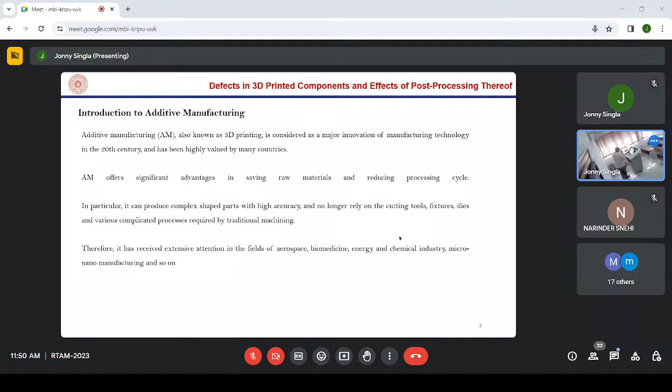Now, this is the basic process workflow of AM techniques. We came out with a publication in the Journal of Manufacturing Processes in 2021, where we gave this basic workflow. There is a digital system, a CAD model. From that CAD model, we do all the pre-processing, generate an STL file, and then 3D data slicing is done. At the third stage, prototype build-up takes place, meaning actual manufacturing happens by adding layer by layer. Then, in additive manufacturing, components always need post-processing, where cleaning, post-curing, and extra material removal take place. Finally, we have the 3D printed components ready. So these are the four steps in the basic workflow of AM techniques.

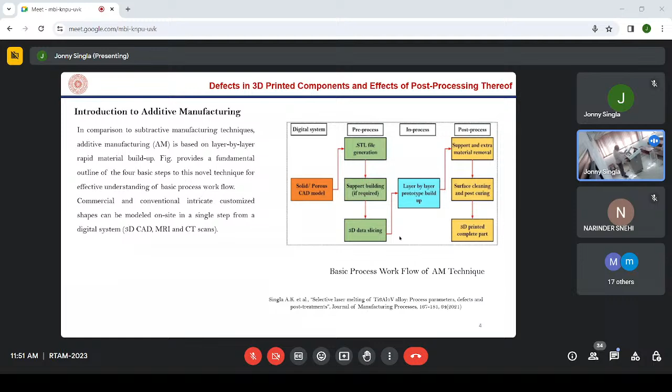As far as additive manufacturing is concerned, there is the ASTM standard F2792 that specifies AM processes into two broad groups: one is powder bed fusion technique, the second is directed energy deposition. These are the two major techniques which are used, and I will discuss the basic difference between these two in a couple of slides.

PBF has developed rapidly over the past decades. It can fabricate a product with high geometrical accuracy, but the costs are on the higher side. Besides, as metal powder is used in PBF, which is harmful to people, it requires additional processing systems to control the hazardous powder environment. In addition, the size of the additive component is generally limited in PBF. So what we do in PBF is we have a powder bed and use a laser source to melt that powder bed according to the 3D slicing and CAD model, generating the 3D component. But in this process, the vicinity of the complete setup becomes very hazardous for the operator, so special equipment is required to control it so it doesn't come out and harm health. Also, a second limitation of PBF is that you cannot manufacture parts of bigger size - there is a limitation on the size of the part, you cannot go beyond that. Because of this, it has limited application. But the geometrical accuracy and printing of the component as per drawing, specifically with narrow tolerance, is possible only with PBF.

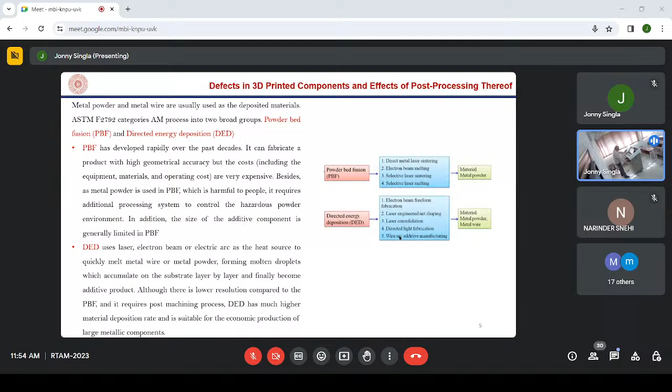Now these two are the schematics of the two systems. In figure A, this is for powder bed fusion, and this is for DED, directed energy deposition. The basic difference is here, if you see, there are two platforms.

Now this platform travels in this direction and this platform travels in this direction. So we have a powder bed and a source of energy, that is the laser source. It melts that powder bed frame by frame, layer by layer, and this keeps on moving downward. And from this side, extra powder which is required, we keep pouring by movement of this second platform. And this recoater blade pushes that powder into this chamber. So this way, layer by layer, the product is prepared and manufactured. So this is the basic technology schematic of powder bed fusion.

In directed energy deposition, we have a substrate plate. Here also we have a substrate plate, on which layer by layer manufacturing takes place. Both the things, powder as well as laser source, are fed externally. And then melting takes place, and then deposition of one layer over the other layer takes place. So this is the basic schematic of both the systems and the basic difference in manufacturing techniques.

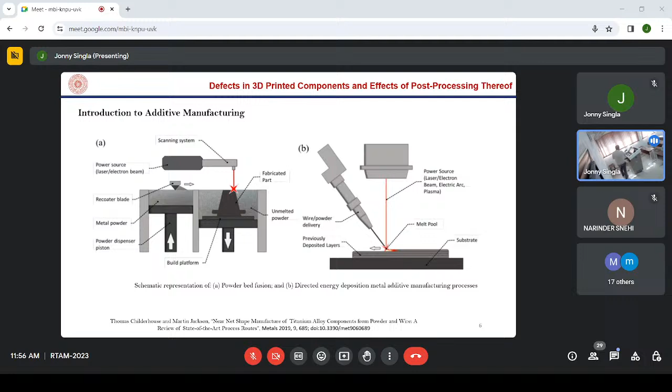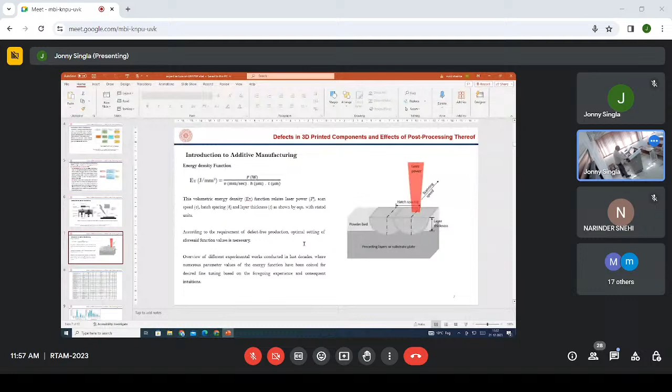Now, if you see in AM, the most important part is the energy density function. Energy density function is given by P oblique. This is the energy density function, and it is given by EV, which is equal to laser power divided by scan speed, hatch spacing, and layer thickness.

All four things have been shown in this diagram. So what do you mean by scan speed? Scan speed is shown in this section, at what speed this laser source is scanning the platform. And this is the layer thickness, how much thick layer you are depositing in each surface scan. And then hatch spacing means between two scans, what is the difference between these two, that is your hatch spacing. And then what is the power of the laser source? All these four parameters put together in this relation define the energy density function.

So it is very necessary that for every material, energy density function should be optimized before commercial production. It is not the case that one type of energy density function will be equally applicable to other materials. You have to conduct certain trials and experiments before reaching an optimal value of the energy density function. So according to the requirement of defect-free production, optimal setting of the aforesaid function value is necessary. Overview of different experimental works conducted in the last decades, where numerous parameter values of energy function have been coined for desired fine-tuning based on the foregoing experience and consequent intuitions.

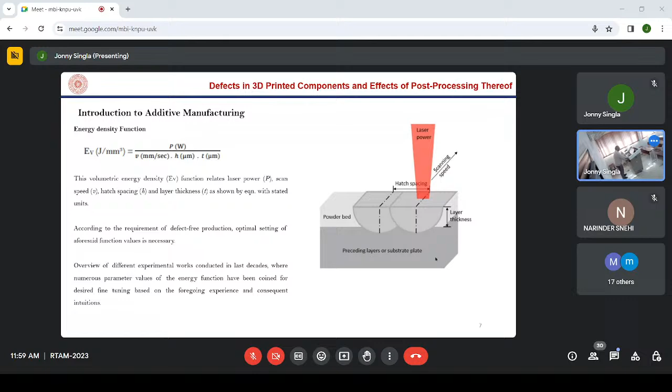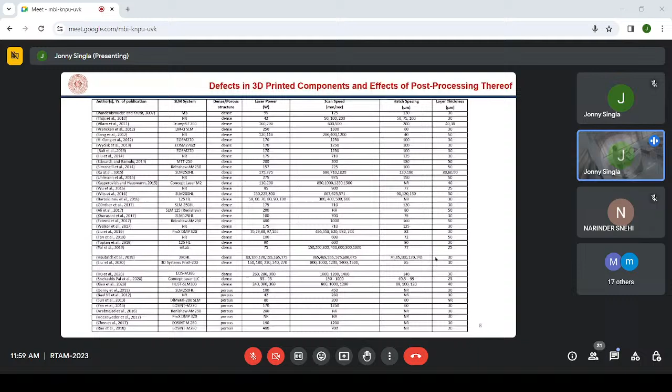So different researchers have used different energy density functions, based on scan speed, laser power, hatch spacing, and layer thickness. And if you analyze this data, and come to a certain graphical conclusion, you will find that the optimal value of layer thickness is 30 micrometer for almost all the materials. That means you have to choose the parameters of the AM technique in such a way that layer thickness should not be more than 30 micrometer, and should not be less than 30 micrometer. So it is in the range of 30 micrometer.

Then hatch spacing is in the range of 80 to 100, or you can keep it on the lower side, between 60 to 100. That means in AM techniques, you will keep hatch spacing from 60 to 100. Then scan speed, what should it be? Scan speed should be 600 to 800 mm per second. This should be your scan speed. At this scan speed, you will get the best results.

Then laser power is in the range of 150 to 200 watts, so keep it around 180 watts. If you choose these four parameters, anybody interested in doing work in additive manufacturing can safely and without doubt keep these four parameters for their manufacturing. These four parameters are very reliable and based on the analysis of the literature, and we have used these four parameters in our own research work and found that these parameters are very suitable for defect-free production.

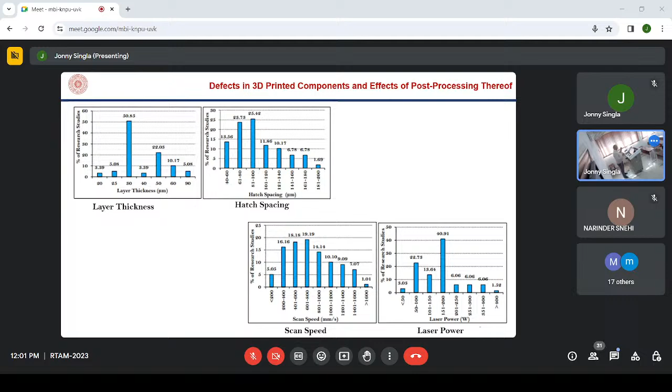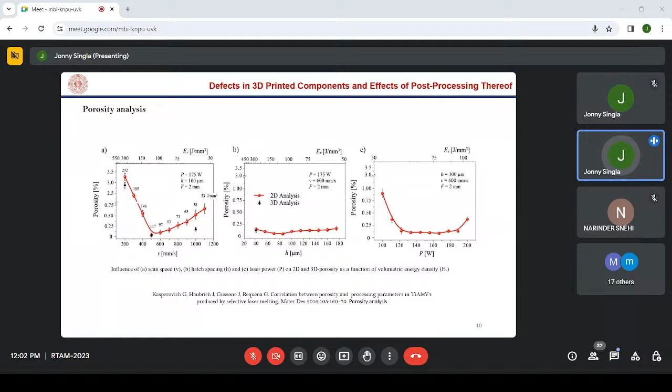And in literature, it has been found that if you keep these four parameters in this range, then porosity will be minimum, because porosity is the biggest problem in additively manufactured components. And if there is porosity, that will lead to poor mechanical properties, because wherever there is porosity in the material, there is a large possibility of initiation of cracks, and that initiation of cracks will lead to failure of the components. So it is necessary that porosity should be minimum. If you keep these four parameters at this level, then your product will be almost a dense structure with minimal porosity. So to summarize, in red: layer thickness 30 micrometer, hatch spacing 61 to 100 micrometer, scan speed 600 to 800 mm per second, and laser power 151 to 200 watt.

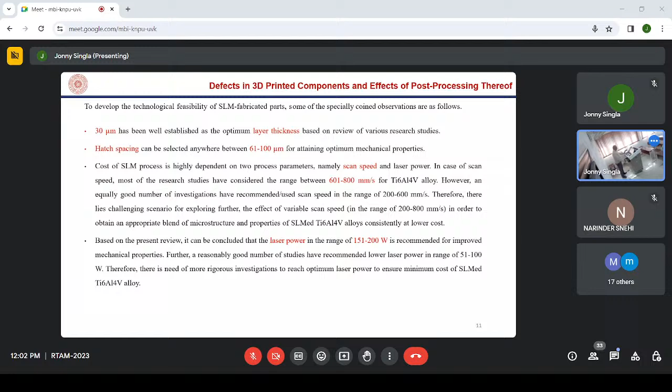So these parameters, if you choose, you will get very good results.

Now let us come to the second part, that is defects in SLM components.

First one is lack of fusion. Lack of fusion is defined as improper melting and fusion of the new layer with the preceding one, meaning improper bonding between the new layer and the previous layer. When you manufacture the component and do SEM, if you encounter this type of problem, that is lack of fusion. Since it is layer by layer manufacturing, first layer, then second layer, then third layer, each layer should be fused properly with the previous layer. Only then it will be a sound product.

If that fusion is insufficient, this defect is introduced, which is called LOF. Based on geometrical morphology, it has been classified into three categories, as previously discussed in the study, with a reference given where these defects have been discussed at length. The primary reason for formation of LOF is insufficient energy density function, as discussed earlier. The author concluded that LOF has maximum influence on fatigue life, because whenever there is a lack of fusion between layers, it is a potential source of crack initiation.

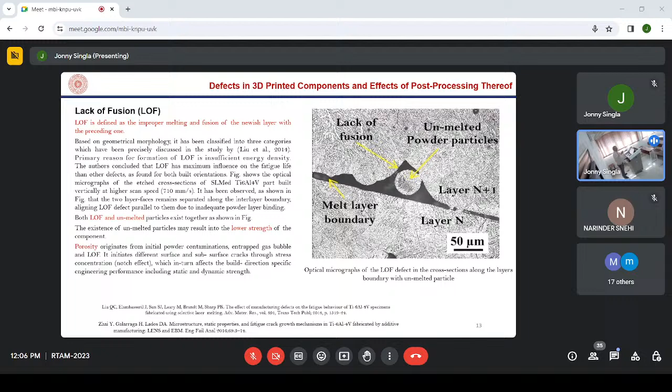Now, when you do research and take the SEM graph, if you find this kind of SEM graph, you can easily identify that this is lack of fusion. Then when you do certain tests, if those tests come on the lower side, you can correlate it with these defects and justify your results.

Second is the gas pore. There is usage of high energy repeatedly for melting, rapid solidification, and directional heat extraction. Too high energy will lead to origination of gas entrapped pores due to material evaporation.

If you use energy density function on the lower side, you get lack of fusion. If you use energy density function on the higher side, there will be evaporation of material leading to gas pore. That means higher energy density function is not desirable, and lower energy density heat input is also not desirable. So you have to keep it in the optimal range.

Sometimes these gas pores appear as crack-like pores, and sometimes as round pores. For higher energy range, we have round pores. For lower energy range, we have crack-like gas pores. Whenever there is a gas pore, that means porosity is being introduced, which is basically not desirable.

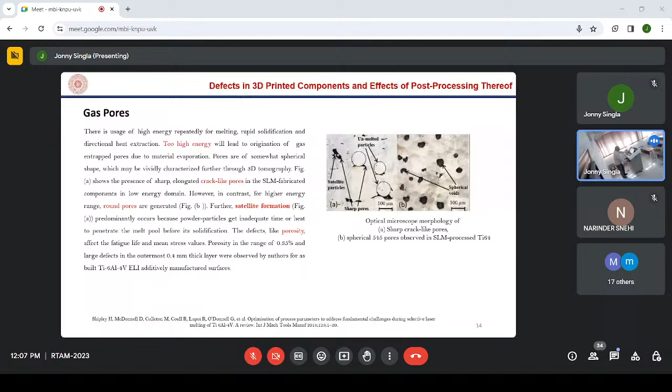Then we have anisotropy. Anisotropy means directional properties, that is, mechanical properties differ in all directions. If a material is isotropic, that means it has the same mechanical property in any direction.

So you have made a wall like this using WAAM, or any other technique. There are three axes: x-axis, y-axis, and z-axis. Z-axis is the build direction. This blue line is the build direction, and the material is built in this direction.

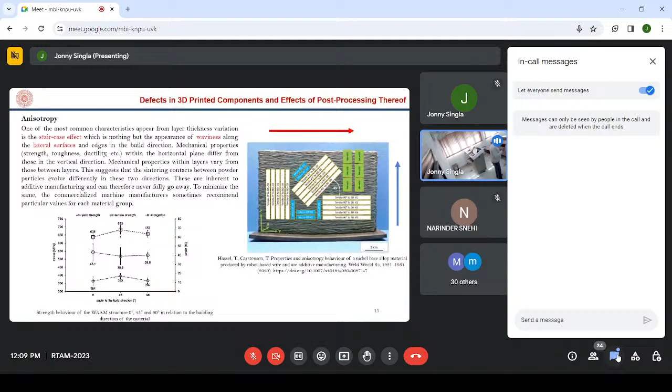If you take a specimen in this section, that means you cut the specimen like this, making an angle of 0 degree with the build direction. If you cut the specimen in the horizontal plane, this means it makes an angle of 90 degree with the build direction. And if you cut the specimen at an angle of 45 degree, that means it is at 45 degree. So if you get the same properties in all three directions for all three specimens, that means the material is isotropic.

But it is not possible in case of AM component. That is the inherent part of additive manufacturing, that you will get directional variation of the properties if you take sample in these three directions, you will get different values of the mechanical property. So this part is called anisotropic, and this is inbuilt in AM. You cannot avoid it, but you can minimize it.

You can take your sample in such a way that the direction which is giving you maximum value, you choose to make your specimen, you make your component from that direction. Now, out of these three, these are the results.

Let us talk about tensile strength first. This symbol is used for tensile strength, this upper line. If you see, at an angle of 45 degrees, you are getting maximum tensile strength, that means you cut the specimen at an angle of 45 degrees. If you cut the specimen at an angle of 90 degrees, you will get a tensile strength lower than the maximum value, but still on the higher side. But if you take the specimen along the build direction, tensile strength is on the lowest side.

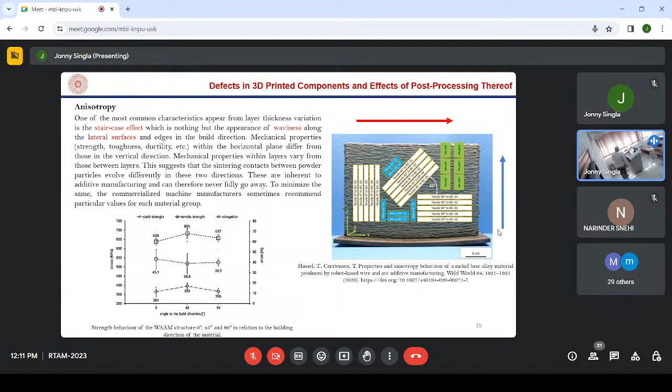Then the next very important defect is residual stress accumulation. Why is residual stress coming? First we should understand it. Internal residual stresses are invariably generated during simultaneous layered scanning due to process-specific temperature gradient phenomena. Whenever you are in the process of adding layer by layer the material, temperature gradient is always introduced, and that temperature gradient is responsible for residual stress accumulation.

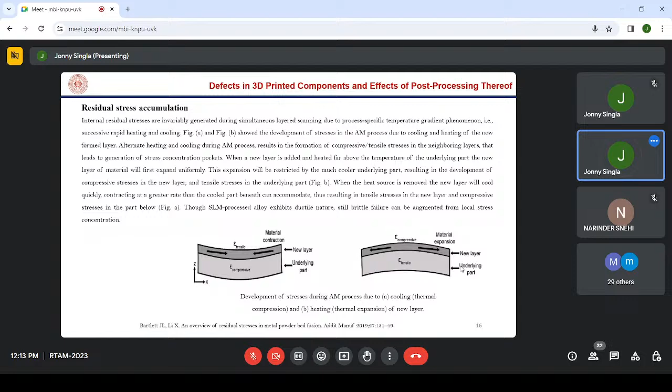Since both are fused together, they will try to put stress on each other. The new layer will try to expand, but the previous layer will retain its shape, its rate of expansion is less. So it will generate compressive stresses in the new layer and tensile stresses in the previous layer.

Whenever cooling takes place, in the next part of the cycle, the new layer will cool faster compared to previous layers. When it cools faster, it will try to shorten, it will try to contract. But the previous layer's cooling rate is much lower, and it will try to restrict that contraction. Because of that, it will produce tensile stress in the new layer and compressive stress in the previous layer.

So this residual stress accumulation phenomenon is such that it will keep adding residual stresses inside the AM component, and it is happening with every cycle.

We know that whenever there is residual stress in the AM component, or in any material for that matter, if there is residual stress inside, it is not desired. It is going to reduce the mechanical properties of that component. Even a human body, if you are under stress, you cannot perform properly. So this is not desirable, but it is inherent. Only thing is you can optimize it.

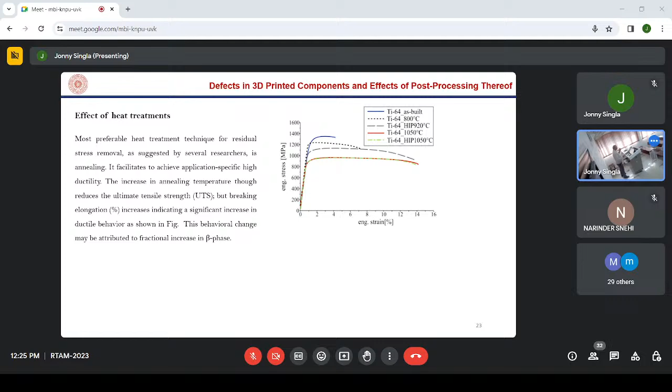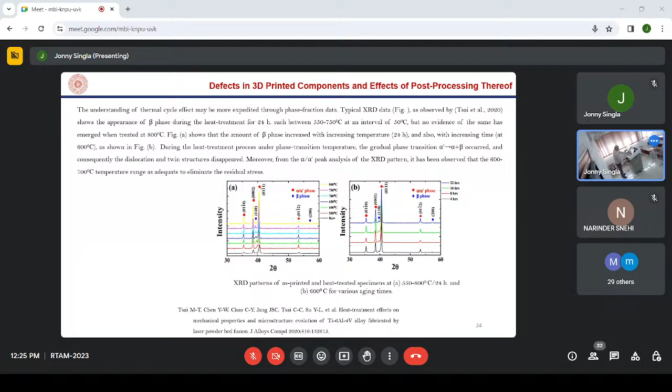Now this is the various heat treatment temperatures used by different researchers, and it has been found that the range from 600 to 750 degrees Celsius gives the best results for post-processing. That means whenever you manufacture a product using AM techniques, you do post-processing heat treatment in this range from 600 to 750 degrees Celsius. This may vary a little for different materials, but for titanium, from 600 to 750 degrees for 2 hours gives the best results.

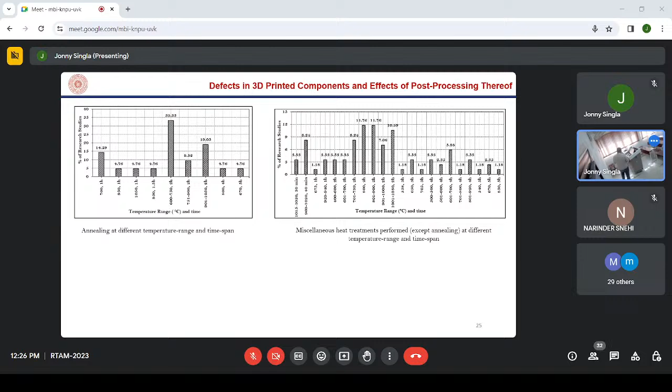Next is the effect of hot isostatic pressing. Hot isostatic pressing is where, along with heat treatment, you also apply high pressure. This is called hot isostatic pressing.

At a temperature of roughly 920 degrees Celsius, you apply a pressure of 1000 bar for 2 hours in a protective atmosphere, so that no oxidation takes place, because in case of titanium alloy and nickel alloy specifically, there is a possibility of oxidation. So to avoid that, we use a protective environment.

If you give this HIP processing at 920 degrees Celsius at 1000 bar for 2 hours, it has significantly good results as far as defects are concerned. These defects include reduction in porosity, which is dangerous, and reduction in residual stresses, which is quite desirable, along with a slight increase in beta phase, a slight reduction in strength, but ductility improves.

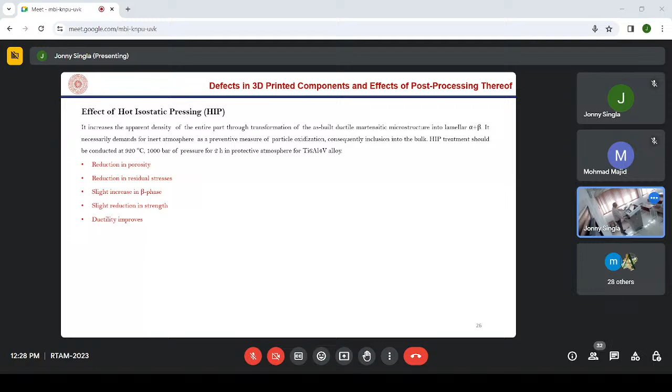So all these five things are desirable for titanium alloy. HIP is the most desirable post-processing technique which can be adopted by a researcher for improving the performance of AM titanium 6Al4V alloy, and for that matter, other titanium alloys too.

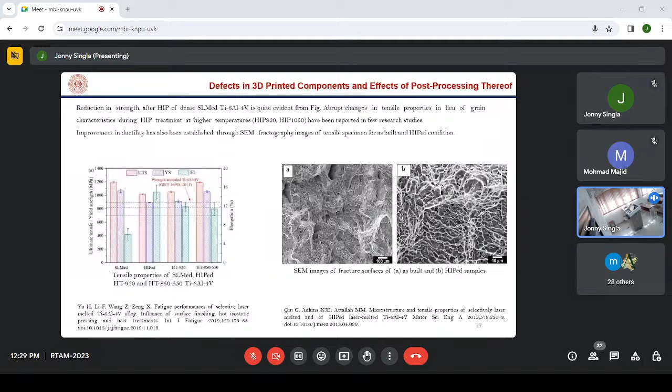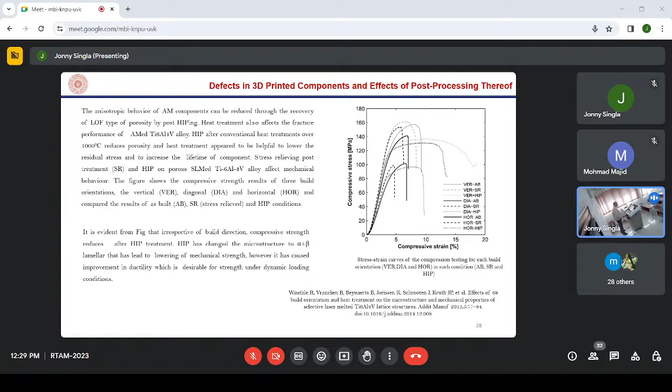This is another study comparing stress relieving treatment, as-built condition, and HIP. AB stands for as built, SR stands for stress relieving which means heat treatment, and HIP means HIP, for all three types of specimen - horizontal, vertical, and diagonal. This research work has identified that HIP is giving the best results.

Then effect of shot peening - this is another post-processing technique. Shot peening is a cold working procedure which causes transverse expansion by plastically compressing mostly ductile material normal to the surface. Shot peening introduces favorable fatigue life increase to the component through compressive stress induction.

If your material has compressive residual stresses, then your material will have longer fatigue life, and fatigue performance will be high. If the component has tensile residual stresses, then it is going to fail early, meaning fatigue life will reduce. With shot peening, we are externally, deliberately introducing compressive stresses into the material.

That is going to increase the fatigue life of the material. This post-processing technique will be used only in AM components subjected to dynamic or cyclical loading. If the material is not subjected to cyclical loading, shot peening is not recommended. Because of this treatment, compressive residual stress and work hardening prevent crack propagation in the surface layer, though it fails to affect subsurface crack initiation. It is only a surface treatment, not affecting the bulk core of the material.

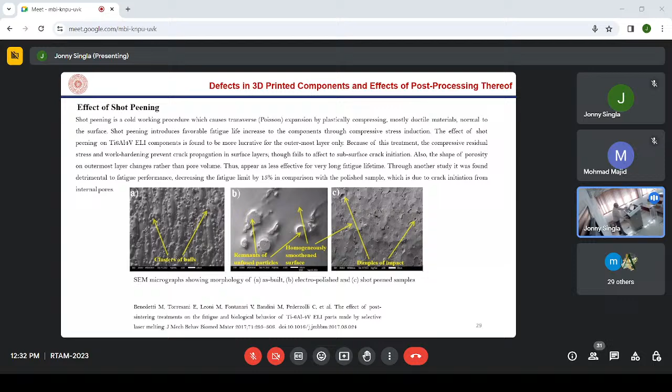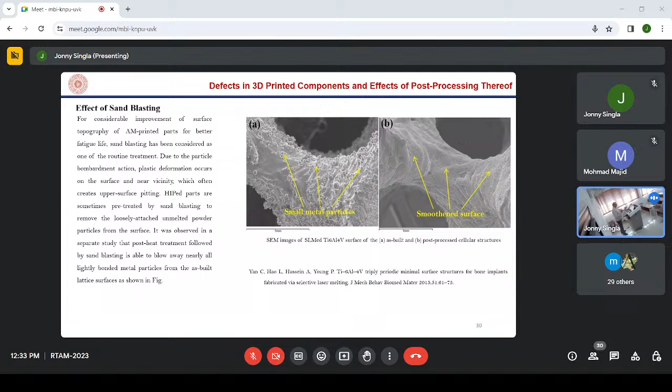Then effect of sandblasting. As the name suggests, a high-pressure sand treatment is carried out on the surface, just to remove loosely bonded particles on the component. In as-built condition, this type of surface morphology is there. When you carry out sandblasting, these loose particles are removed. The purpose of removing loose particles is so they don't act as a source for crack initiation - these act as surface discontinuities, which are removed.

Other miscellaneous post-processing techniques are abrasive flow machining, which is used sometimes, and laser shock peening, another technique used for post-processing. Then friction stir processing, now used along with additively manufactured components. We have seen FSP in conventional manufacturing, but in AM also it is used, and it helps in grain refinement, reduces porosity, improves micro hardness, and reduces residual stresses on the as-built AM component. In our institute, we have recently purchased an FSP setup, and soon some students will be working on this.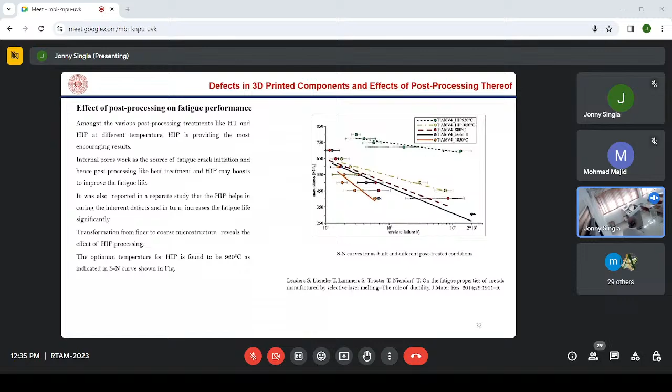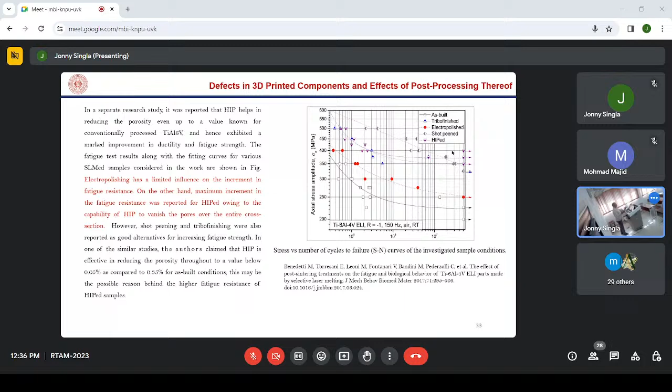Now when you supplement your testing results with characterization using SEM study, you can understand why there is improvement in fatigue strength. This is the reason for the improvement in fatigue strength.

Now if you see, this is your martensitic structure, needle-like structure. As-built AM components have this SEM surface morphology - the microstructure will be like this. These needle-like structures have high strength, but they reduce ductility. This is called martensitic structure, alpha dash. When you carry out post-processing heat treatment or HIP, the structure will change like this.

These laminas will be thickened. These thick laminas, due to formation of beta phase, will have increased ductility. But at the same time, the strength of the material is going to reduce a little bit.

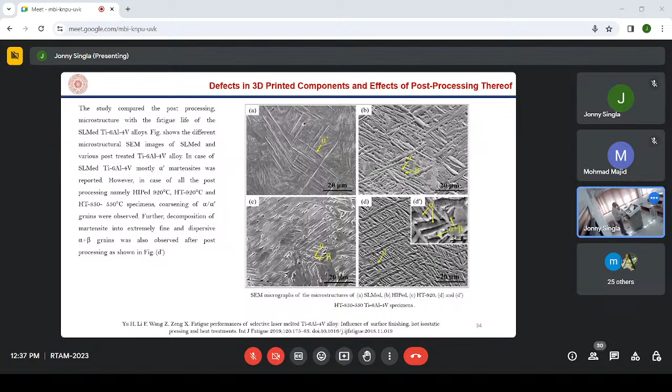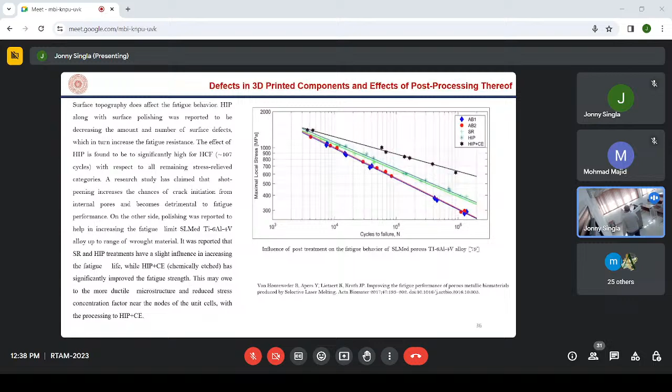This is again the same 3D thing. In this study, it has been found that if you carry out HIP and supplement it with chemical etching, HIP followed by chemical etching gives even better results compared to HIP treatment alone. So HIP plus chemical etching can be used for improvement in the fatigue properties or dynamic properties.

Now here is a summary of all the effects of the post-processing techniques.

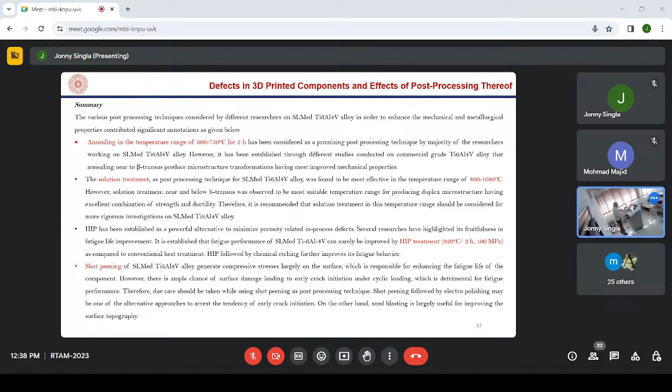Now let us discuss something about WAAM. Why do we go for WAAM? The raw material used in additive manufacturing is of two types: either you use powder or you use wire. In case of wire, there is a cost reduction.

The cost of metal wire is only one-third or half of the metal powder for the same material. If you use wire, its cost will become one-third or half.

And if you change the source also, using arc power instead of laser power, the cost will be reduced by 90%. So wire arc additive manufacturing: one, you are using wire; second, you are using arc power. Both of these factors are going to reduce the cost by 90%.

Because of that, WAAM is now getting attention of the industry, because the main thing is how to reduce the cost of AM components. Although there are certain drawbacks with WAAM compared to other techniques, these can be taken care of with suitable post-processing techniques, and at least you are able to manufacture a complex geometry with AM techniques.

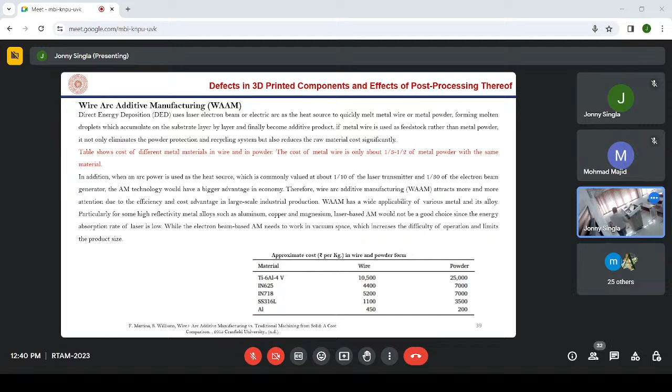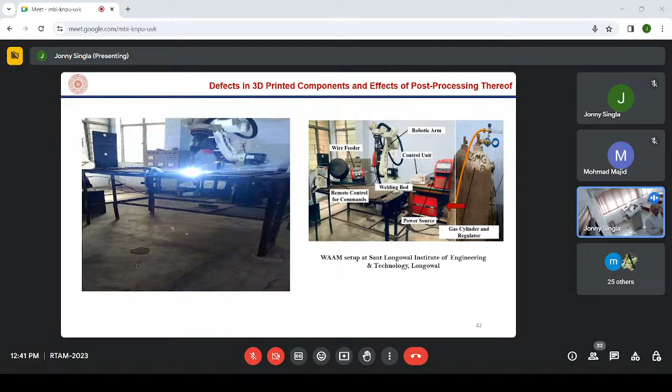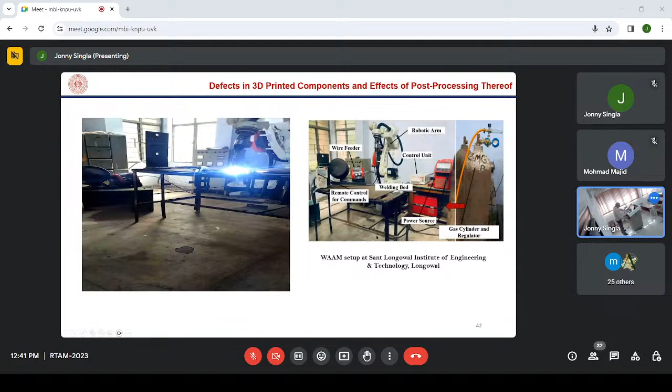Now this is a video. This has been in what you can say an unprotected environment, but we have designed certain chambers also. Students are working on this and using it. So this is the detail of the setup.

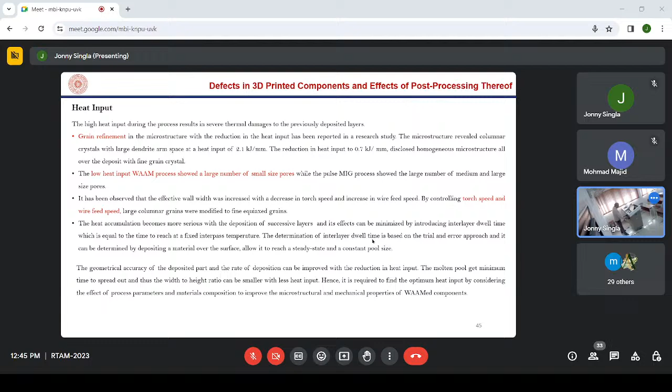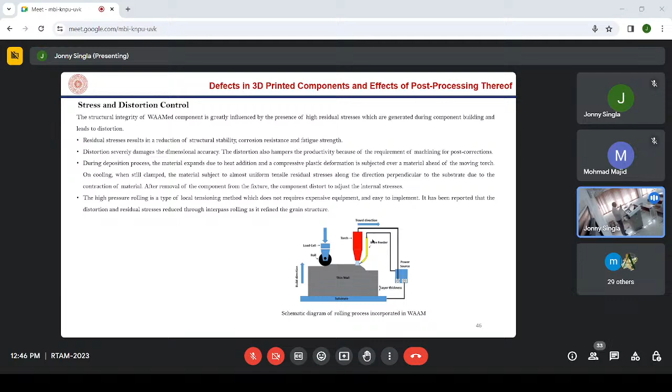So one solution for distortion control is high pressure rolling. As you make a layer side by side, you give a rolling process. This rolling process helps in controlling the distortion. If you adopt this technique, then residual stresses as well as structural integrity can be achieved.

Then we have surface quality. Poor surface quality of the WAAM product is also a concern, a big challenge. Secondary machining process is always required to improve the surface quality. So some researchers have used milling operation on WAAMed components to improve the surface quality.

Another option is you can preheat the substrate to a suitable temperature. You have a substrate plate on which you are building the wall, so that substrate plate can be preheated to improve the surface quality. Secondly, a third option is you can use a protective environment, especially for non-ferrous alloys where oxidation is the biggest concern, like titanium.

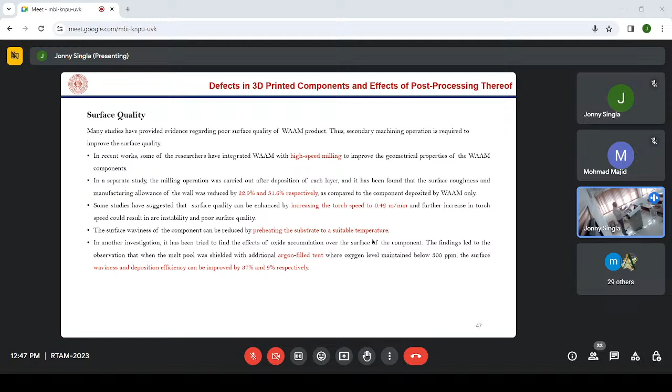Corrosion is also another issue for WAAM components. To understand this, note that the horizontal plane observes more cooling rate as compared to the vertical plane. So there are differences in microstructure in terms of grain size, phase structure, and orientation. This non-uniform microstructure leads to anisotropic corrosion behavior of the WAAMed component.

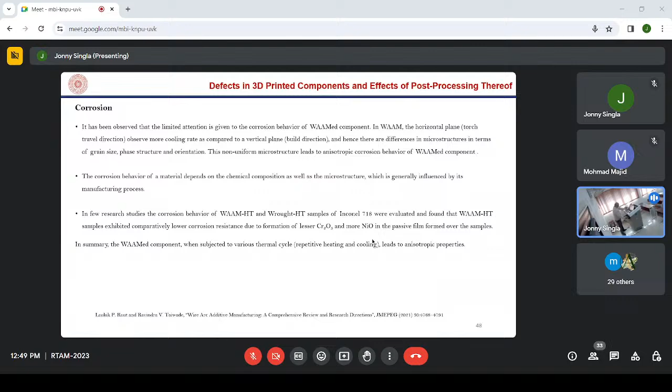If you take proper care of your manufacturing process through WAAM - the torch speed, the scan speed, the wire feed rate - then you can control the microstructure of the material. And if you are able to control the microstructure, the associated mechanical properties are bound to improve. The only thing is you should, through trial experiments, first establish these parameters and then manufacture. Now these are some of the conclusions and future openings for WAAM.

Most of the research work is carried out on aluminium, steel, titanium and nickel based alloys. Little importance is given to fabrication of bimetal or functionally graded materials. So if you want to work, you can work on functionally graded materials - the possibility of fabrication of functionally graded materials and improvement in the fabrication of bimetal needs to be done.

It is observed that little research is done on online inspection of the bead geometry and defects during WAAM fabrication. The offline inspection of faulty components after manufacturing leads to higher material loss and higher associated cost. This highlights the need for real-time defect detection and closed-loop control systems to reduce the overall processing time and make WAAM a more robust and potent method.

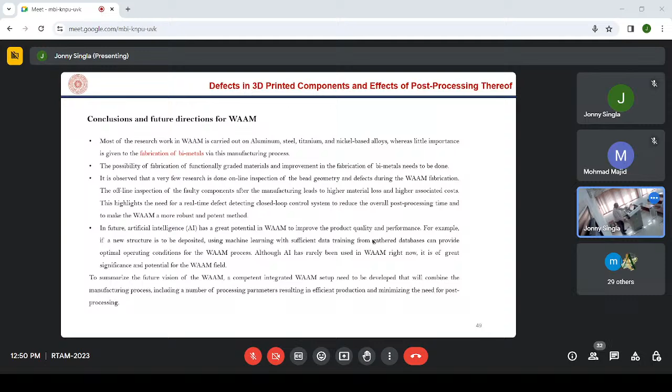In future, artificial intelligence has great potential in WAAM to improve product quality and performance. If a new structure is to be deposited, using machine learning with sufficient data training from a gathered database can provide optimal operating conditions for the WAAM process. Although AI has rarely been used in WAAM right now, it has great significant potential in the WAAM field. AI can be used very successfully in WAAM, but no work has been done so far. So these are some of the future openings.

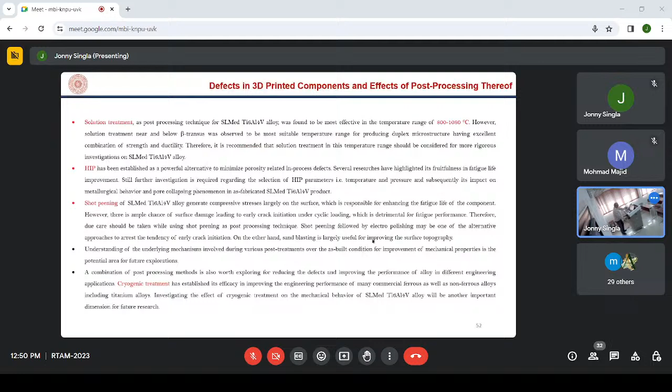So just as bimetals are affecting very enormously - so then which metal would we generally prefer to produce this, or what steps could be followed? A bimetal - first of all, we have to see what is our requirement, what is our application. Accordingly, you will choose two materials for producing a bimetal component.

Bimetal means it is a combination of two materials, two alloying materials, right? If you want to add a particular material to an alloying element, that can also be a bimetal. That means, if you are manufacturing a titanium alloy like Ti-6Al-4V and you want to overcome a negative feature of titanium, you want to add a new material to it - so that can be done.

That means you take the wire of another material and then you do it. But how these defects will appear, that is a matter of study.

Not much work is done in bimetal and functionally graded materials, so until literature studies come out on this, we cannot say much about that particular material. For studies on this, basically hit and trial can be used, unless you have data from the knowledge of conventional materials - if you have some data related to that, if you want to add this material to another material, what are the possible or anticipated improvements in the properties. If you have that data, then you can go for it. If you don't have any data related to this and you randomly select any two materials and try to build a bimetal, then that is not a good approach.